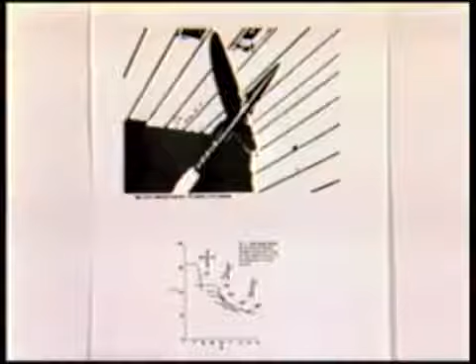At Ames Research Center, we tested a model of the oblique wing with a small fuselage, as you see there, 10-to-1 ellipse, 10% thick. Everything was in our favor. This next slide shows the lift-drag ratios we got. At zero sweep, this wing-body combination had a lift-drag ratio better than 30-to-1. And as the speed increased, Mach number 1 and 45 degrees, we got an L over D of 20. And the tunnel only went up to 1.4. We got an L over D of about 11. And the next.

Then we tried, maybe we could push that up a little. We tried different airfoil sections. First, airfoil number 1 was a NACA 4-digit section. Number 2 was one of Whitcomb's supercritical airfoils. You see the supercritical airfoil really did its thing when the wing was straight. It maintained an L over D of 30 out to a Mach number of 0.8.

However, when the wing was swept 60 degrees, it didn't perform as well as the one with a very high camber, number 3. So I'll have to ask Dick Whitcomb to design me an airfoil that will work with 60 or 70 degrees of sweep. It will have to have a design lift coefficient of 1 or 1.5 preferably, and a Mach number 0.6, 0.65. Okay?

Now, this is an analysis of those tests. One of the things that worries people about sweep with subsonic leading edges is that you may not get the leading edge thrust. Okay? The lift-drag ratio depends critically on that. Well, this shows that you do up to a certain small lift coefficient. At about 2/10, it breaks away, flow separates from the leading edge, and you lose the leading edge thrust. But 1/10 to 2/10 is good enough for cruise. Okay?

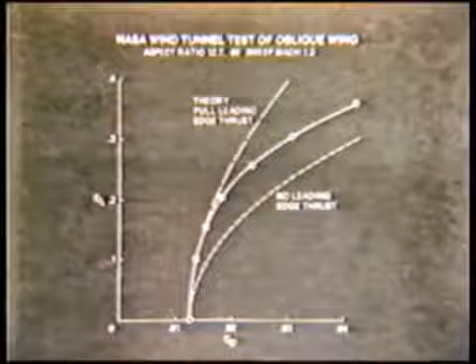Well, this shows my estimate of the lift-drag ratios that you can get with oblique elliptic wings plotted against Mach number. And you see the L over D improves rather dramatically as you increase the aspect ratio of the wing. 10-to-1 axis ratio will get you almost 15 at Mach 2. Okay?

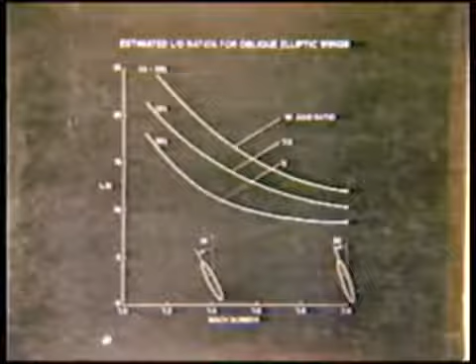Now, if people are going to ride in this, as I said earlier, the flying wing has to be very large. And I say the root chord at least 50 feet at 8-to-1 means that the span has got to be 400 feet. Okay? So you say, well, good heavens, we can't build an airplane that big. But we did build the Akron and other big airships that were twice that large. Okay? Moreover, the load on the flying wing is distributed along the span. You don't get any strong bending moments. Okay?

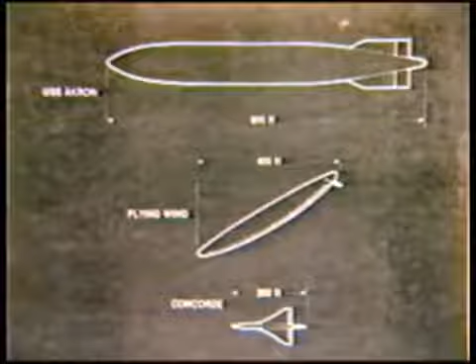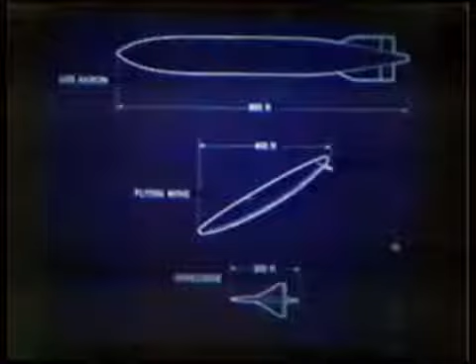There is another thing. We now have reliable means for automatic stability. The airplane doesn't have to be inherently stable. So the older flying wings, like the Northrop and the Pterodactyl in England in the 20s, the center of gravity had to be at about 20% of the chord, way forward, so that most of the volume of the wing was unusable. See? But if we can put narrow trailing edge flaps all along, actuated by a computer to provide stability, then we can move the center of gravity back to about 40% of the chord, well, 35 anyway, closer to the center of volume. That makes the flying wing much more practical.

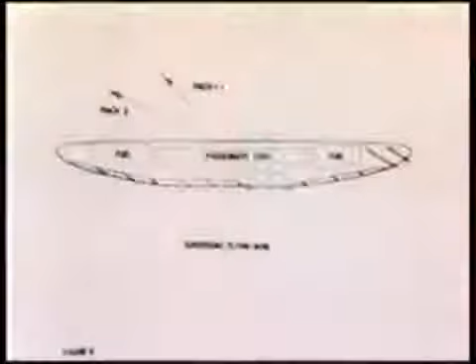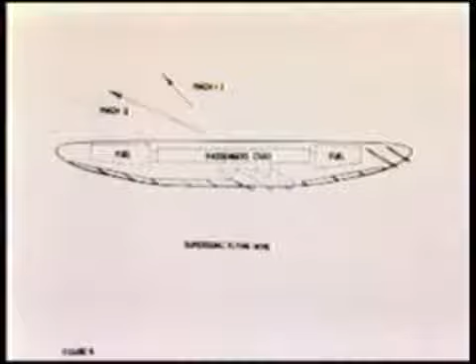Well, this shows a sketch of an arrangement. 300 passengers, 400-foot span, fuel in the outboard sections. I have 2 arrows there at Mach 1. At Mach 1 or below, it would fly at 45 degrees. Now, the pilots landed the AD-1 with the wing at 45 degrees. If you can land this wing that way, then you may not need to swivel the engines. Okay? All you need to do is redirect the thrust by about 25 degrees. So then, the only variable geometry is in the fin, or perhaps vanes to redirect the jet. So you just steer the airplane around by the fin, okay? No pivot.

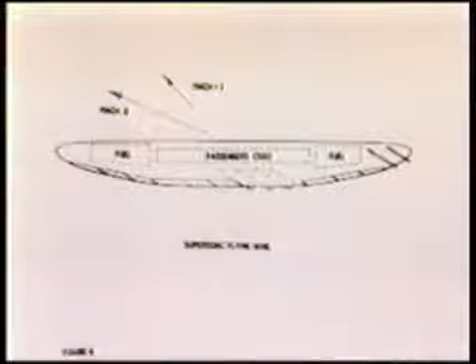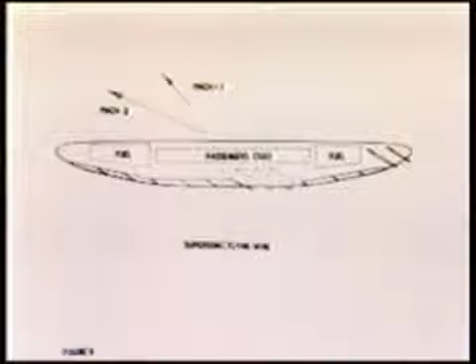Now I have another arrow for Mach 2. Now I should have a third arrow there that says Mach 0. And you can guess which way that arrow points. It points right along the length of the wing. See? So you can have any number of them parked at the terminal facilities. The real reason the Navy likes the oblique-winged airplane is they can get more of them on the carrier. They fold the wing back.

Anyway, when Boeing announced that it was going to increase the span of its 747 by 80 feet, the airport operators objected strenuously because they couldn't accommodate them. Well, you see, this has a span, namely chord, of only 50 feet. So you can get lots of them at the terminal. Well, there's a concept. It's hard to make it look like an airplane. Right? That's as close as you can come.

Now this shows my estimate of the pounds of fuel per passenger versus range. Now you see the Concorde needs 2,000 pounds of fuel to cross the Atlantic. If everything goes well, it will land with 50,000 pounds. It needs 50,000 pounds to get to an alternate, okay? Because of the poor subsonic lift-drag ratio. But you see, if you remember the lift-drag ratios for the flying wing, does anybody know of an SST design that has lift-drag ratios as high as those over the flight range?

I want someone to tell me what's wrong with this. No, nobody does. I know it doesn't look pretty, but anyway.

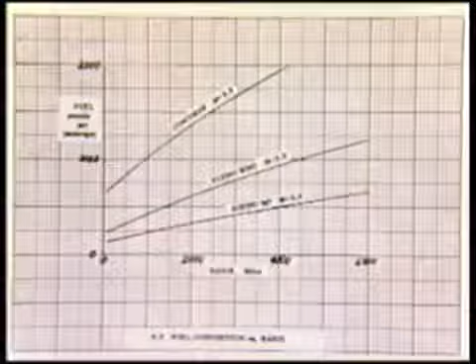Well, of course, we cannot compete with a 747 flying at Mach 2. I don't think there's any way to do that. But we can do a lot better than Concorde. See? Now, in the subsonic range, you have an L over D of at least 20. If you straighten the wing out completely, you have 30. Okay? And that seems to me the picture. With the flying wing, we can make a supersonic transport that will cross the Pacific, okay? Which is where you really need the supersonic transport, I think.

Now, I should say something about the engine requirement. Am I running out of time? What? Lots of time. Lots of time.

Well, see, if you have an aircraft configuration that shows flexibility, that has a high lift-drag ratio at low speed and also at high speed, then you ought to have similar flexibility in the engine. For example, the engines of the Concorde are very efficient at Mach 2. The conversion efficiency is 40%. Okay? But being pure jets, when they slow down to Mach 2/10, their efficiency drops to about 1/10 of that. And that is partly responsible for the large fuel requirement at low speed.

Right? So what you want is a fan jet at low altitudes and low speeds where you have a large slipstream, okay, good propulsive efficiency. At high altitude and high speed, you don't need the large slipstream, okay? But since the air density is an order of magnitude less than at sea level, you need to swallow much more air. You need a higher compression ratio, okay? So at high altitude and high speed, you ought to put the fan in series with the compressor, okay?